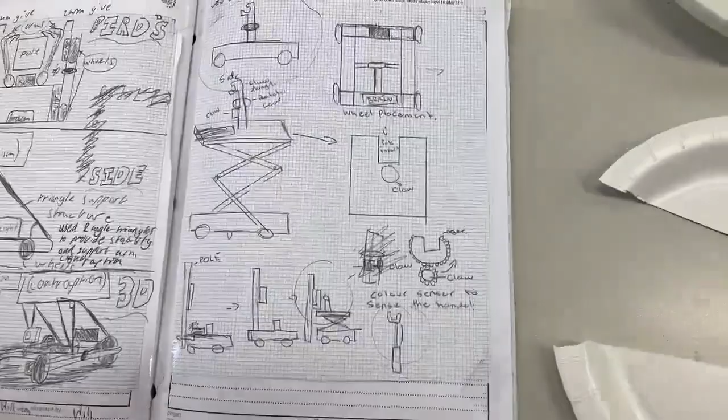So it started off with just a brainstorming and a sketch of how we can make the robot. This is the first little design of it that I ever made. We've got a claw that will go into the pole, and then a gear that can rotate around it.

So from there, I went straight into prototyping, and I started off by making a paper plate version of it, just to see how it can fit into the pole, and have a little play with it.

Is there more information in that book?

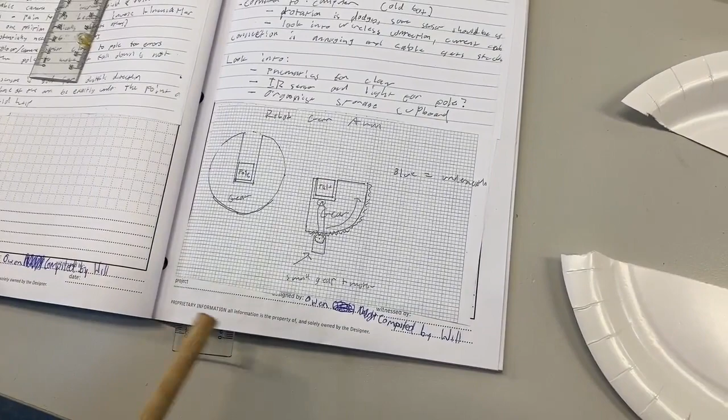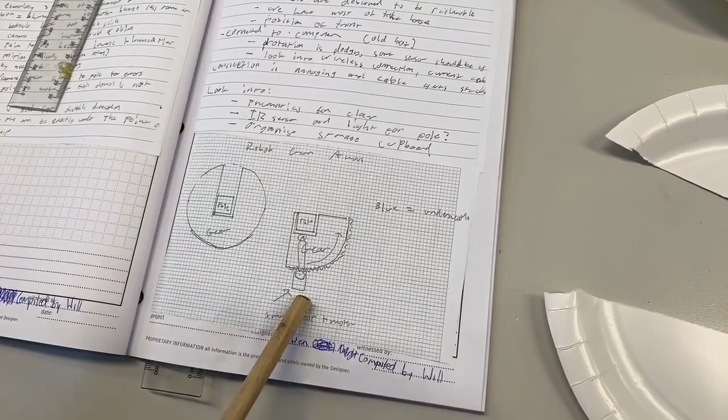I also had a little play around with the shapes it can be. I figured that the arm that holds the pole is only really going to need to rotate 90 degrees, so there was an opportunity for us to only make it a quarter of a circle. But I think in the end we did end up going with a full circle, just so it gives a bit more give into going into the pole.

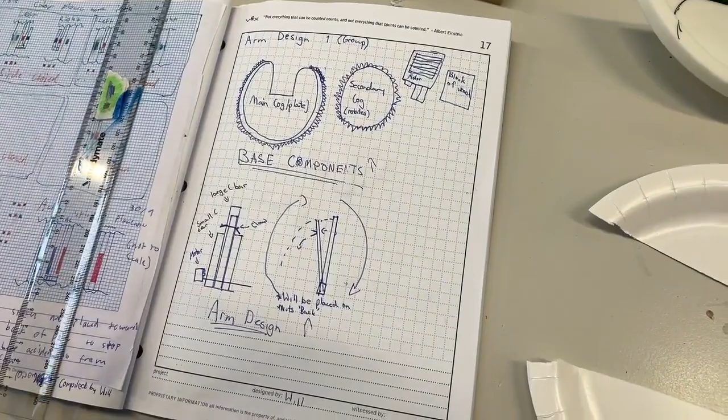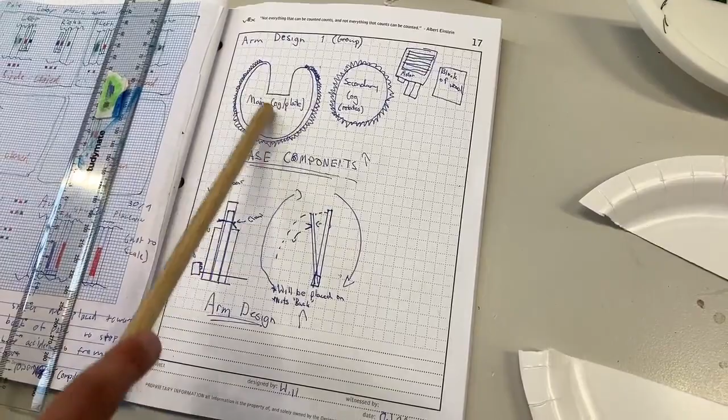This was just a bit more of extra designing parts of it. So we had a look at how the gears are going to go onto it, and also creating a lip, so the gears can be thicker, and the main plate of it can be thinner, and it will also be able to house a bearing.

So you start off with a paper plate? Yeah, so I started off with a paper plate, and then I went on to just making a design of it without any of the cogs and stuff.

I'm wanting to round off the corners so that in case our bot doesn't exactly line it up perfectly, it will be able to slide in place.

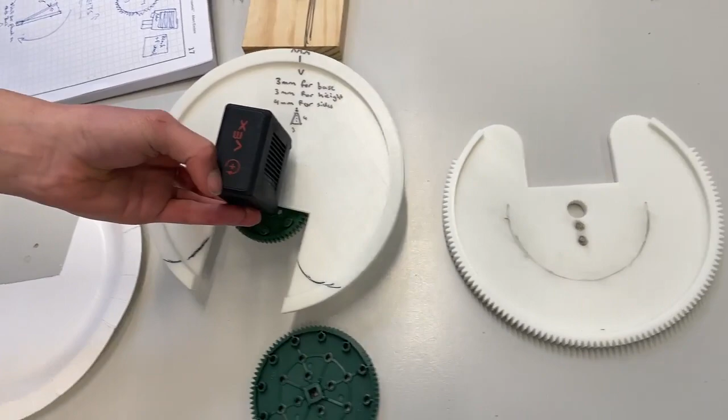And then I moved on to starting to measure out the cogs of these gears here. So I took measurements for them, and then put them into Fusion 360 and started designing them, which moves me on to this one here.

So I've added cogs to this one here, as well as a hole that will be able to line up with the lever, as well as being, hopefully in the future, able to hold a bearing.

So the first issue with this one here is that I made the gears too big, and also the wrong shape, so they did not fit.

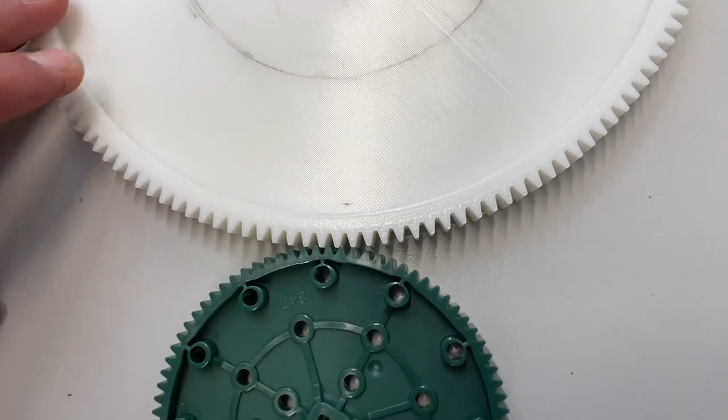And a solution for that was I had a bit of a play around to see if I could get the gears the right shape, and made a little piece of it, and in the end they managed to fit perfectly, which I was really happy about.

But unfortunately I did still print it incorrectly, and they did not fit again, which was unfortunate.

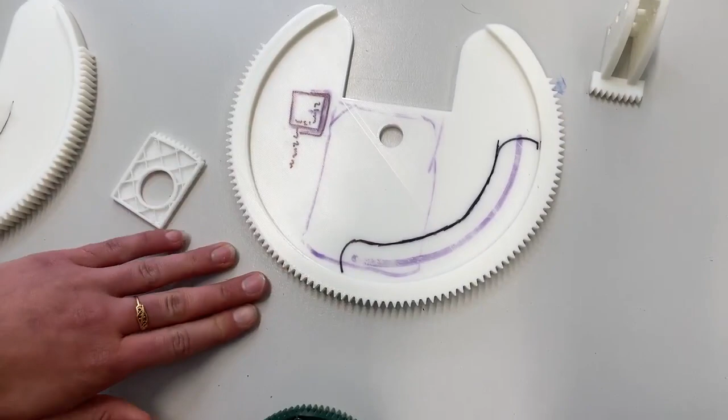But in the latest version, I've made the final changes, and they will fit perfectly in this one here. So it's on there at the moment, isn't it? Yes. Do you want to show us how it meshes?

Yeah, so this is the latest version of it, and will be one of our final prints. And as we can see here, it does fit perfectly into it. This is a part of the bot at the moment.

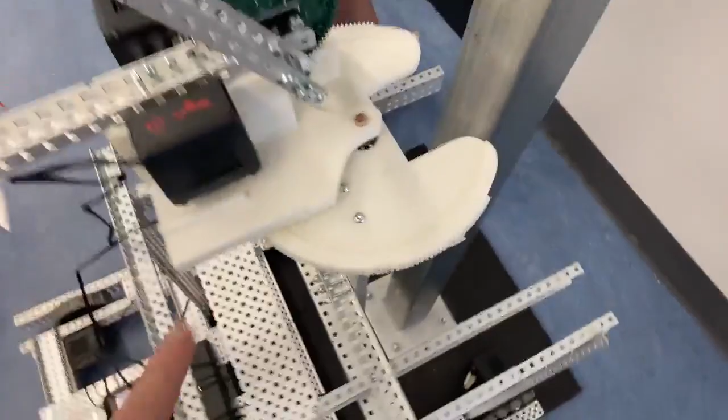So what's this bit? This bit is a paddle, and I designed this to house a gear underneath, so that when this rotates, it will be able to...

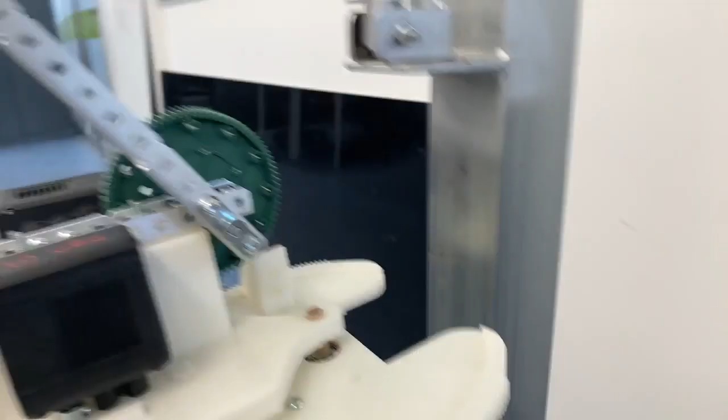Do you want to grab the remote? Yeah, which one is it? It's left and right on your left hand, these two, and they move very fast. Okay, so it enables it to rotate.

Yeah, so that's also a casing to hold the arms and the motor. So let's take this off, so that way you can see underneath. Yep, so that's all it is.

So this is a bearing that it can hold, so it can slide along the rim of the cog gear, and there's also another bearing in here.

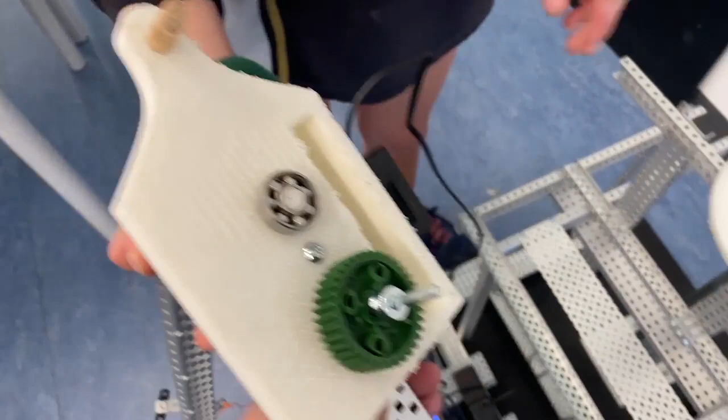So that goes into this little piece of wood, which will be 3D printed in the future. And then this big brick in here, this holds onto the arm of the bot that will be able to hold the lever. So is this the final design?

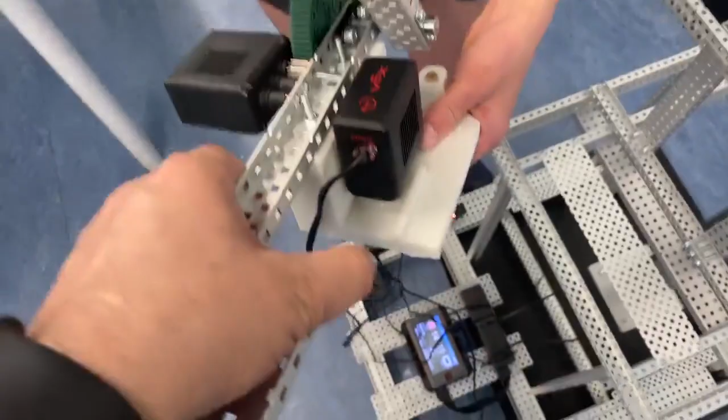No, this is not the final design. Have you got it on your computer? I do. Let's put that down. There are a few tweaks that I needed to make to it.

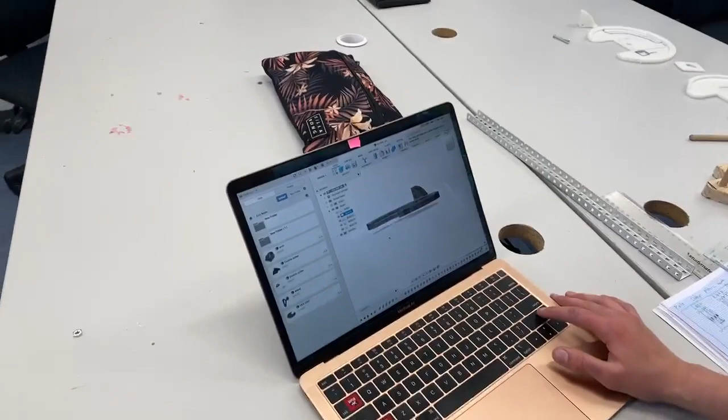Yep, so I've made the rim of my final design a bit bigger. So you're using Fusion 360? I am using Fusion 360, yes.

Just so that the bearing will be able to hold into it better, and it will also be able to support the arm more than just the inside of it. And the paddle somewhere.

And this is one of the final designs of the paddle. So I've made this block here bigger, so that it's taller than the motor.

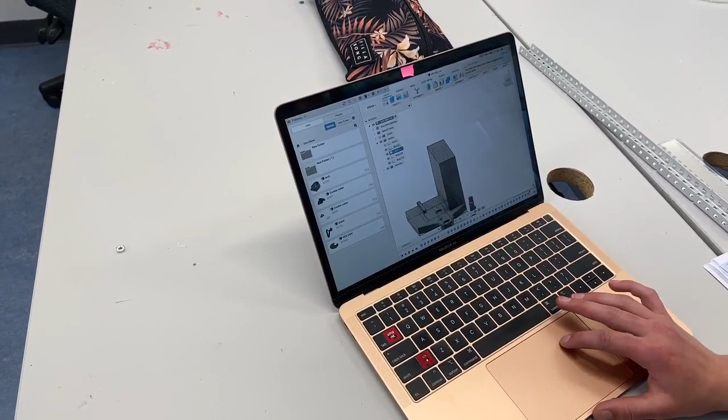That spins it pretty much. And these parts will go into here so that it can hold the bearings.